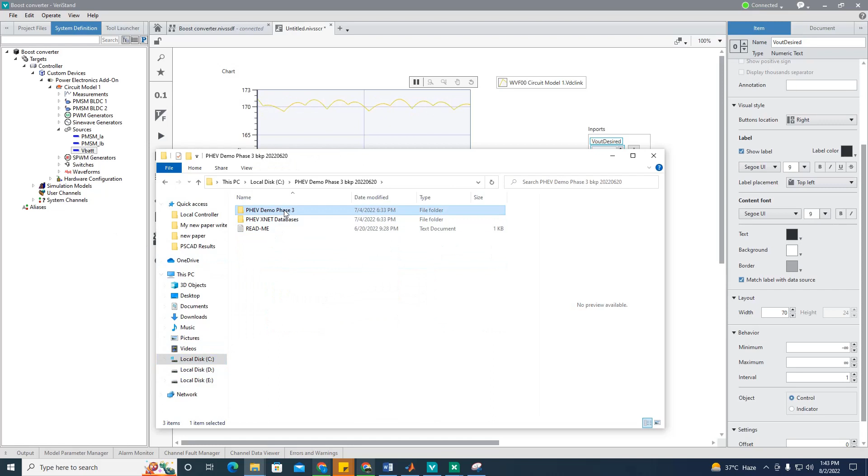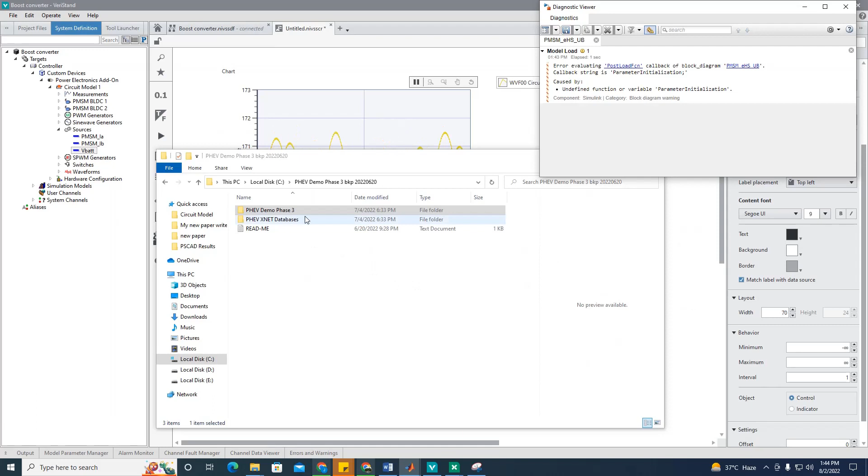So this is a circuit model, and this is the circuit model that is running right now. I am only interested to see for now VDC link, which I am showing over here at the output, and let me show you the controller over here. The controller is shared project, local controller. You can see that this is the controller.

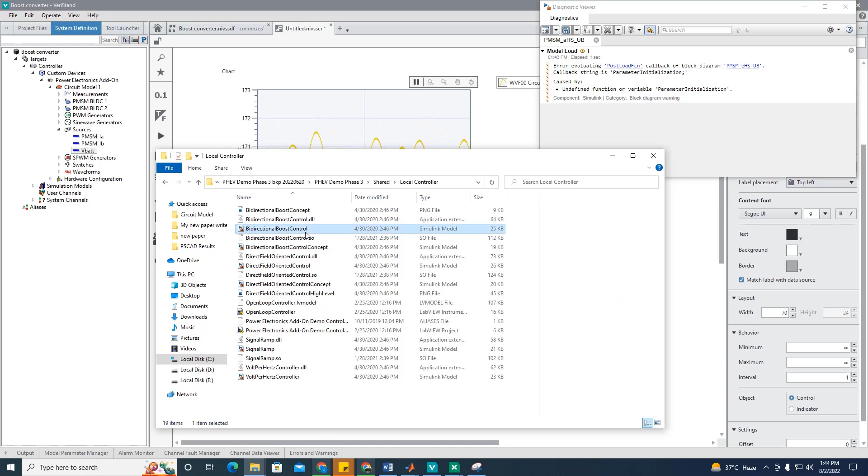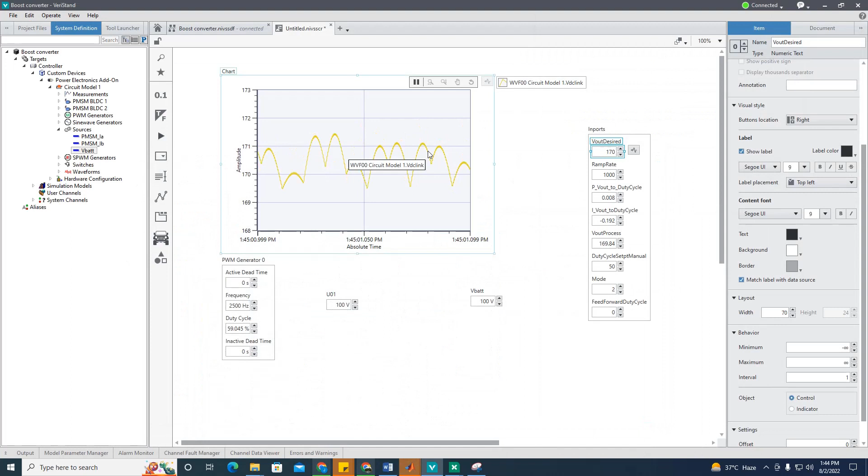All right. So right now this controller is working in Phar Lap, and this is giving satisfactory behavior. Okay. Same controller, now I am going to test it. If I check it in manual mode, in manual mode it's also working fine, 50%. If I make duty cycle 60%, it will move to 250, working fine. 50% will move to 200, it's working fine.

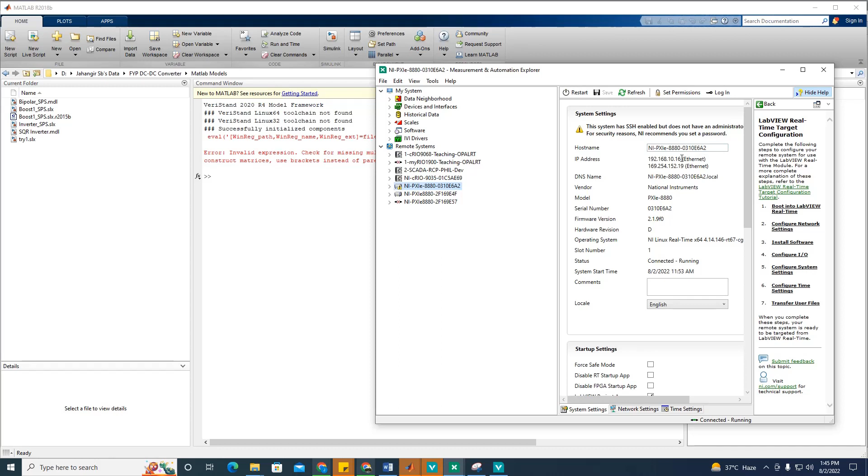Now after that I disconnect it, I go to configure, and I am now trying to run the same example in this PXI which has NI Linux RT with IP address ending in 16. I go here in controller, I select here NI Linux RT. Let's give it IP address of 16, save it,

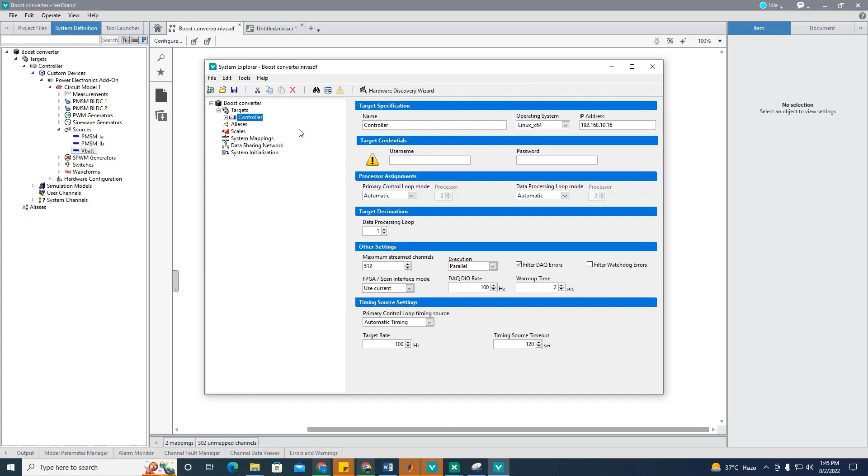and then let's deploy it. At this stage, it should give us an error. I understand it will give an error because the controller file that was operating in Phar Lap was .dll, but now it is operating in Linux RT. It requires a .so file, so it shows that the specific model is not compatible. I understand. Okay, then I go back here to configure.

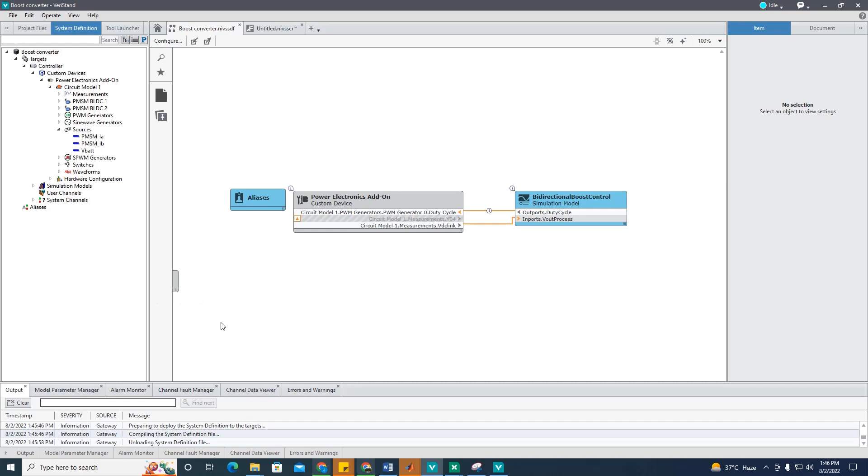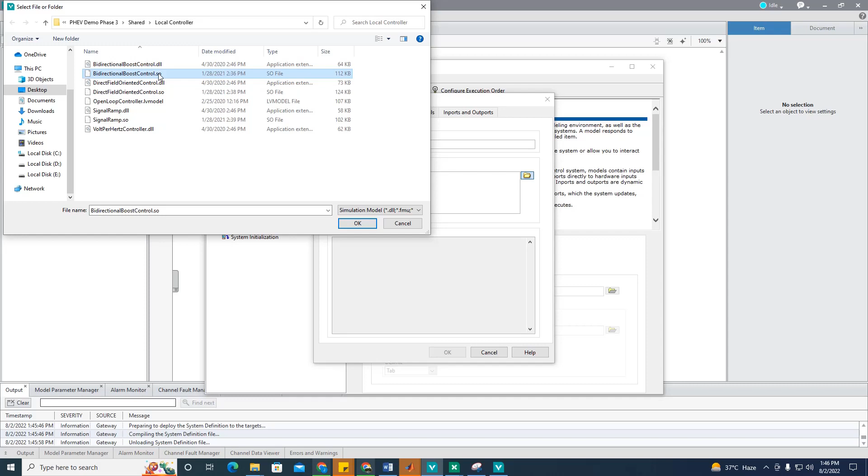I go here to the simulation model. What I do is I remove this model, delete, okay. Then I add simulation model, I search over here and I give it the .so model, bidirectional boost control. Instead of .dll, now we need to give .so because it's Linux RT. Okay, clicking OK. These are the inputs, these are the outputs. Mapping will be the same.

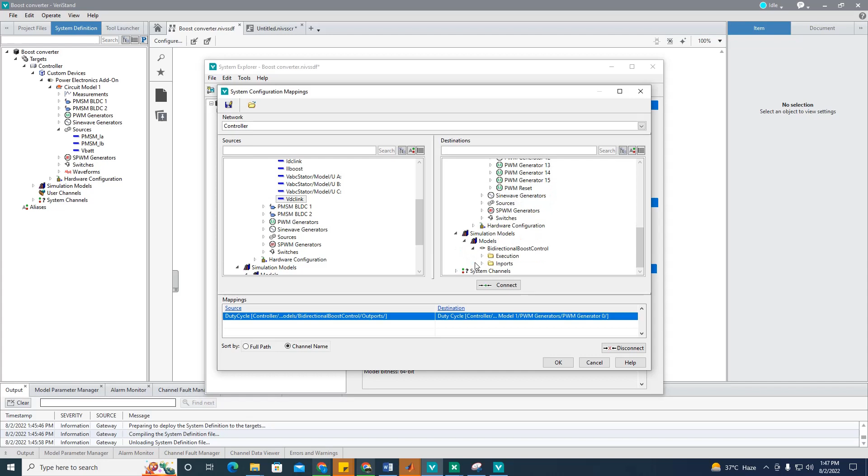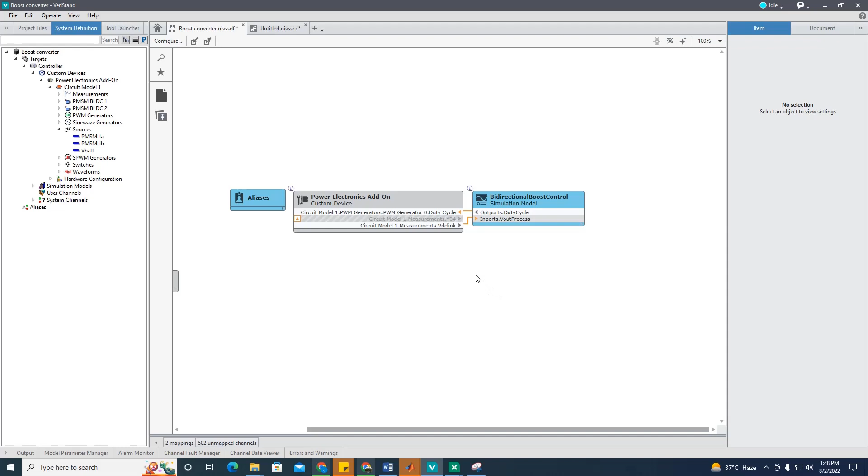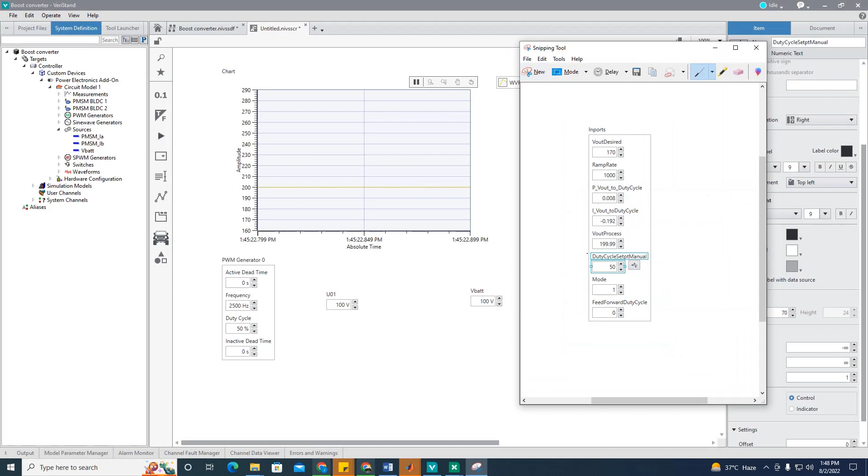Okay. Alright. Now we run it. Deploy. Now before running it, cancel, let me take a screenshot of these parameters. I will keep it the same, though I remember these values. Okay, deploy, save. It will be ready in a few seconds. Yes, target synchronization is complete.

Let's give V battery 100 volt. Let's give V out desired 150 volt. Ramp rate is the same, 1000, as before. P 0.008. This will be minus 0.192. Let's make duty cycle manual 50% and first mode 1. Yes, it's working in manual mode. It's working fine in manual mode.

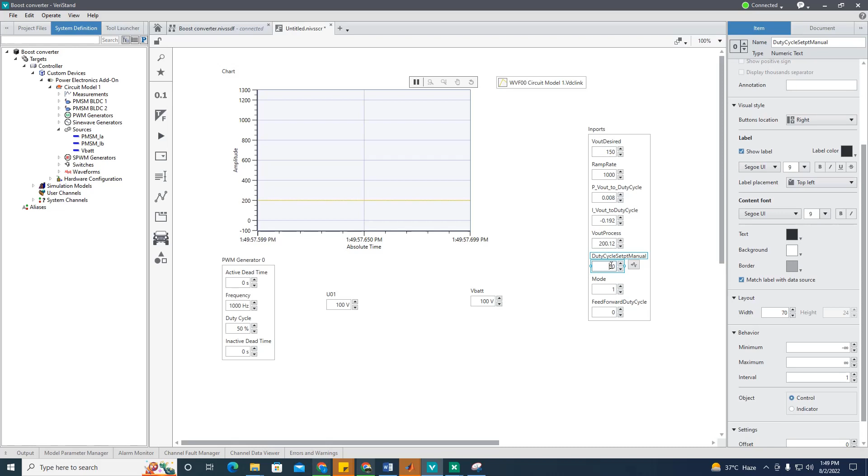If I make it 50%, it will give 200. If I make it 40, 1 minus D 40, then it will give 250 right. It's working fine. Now if I move to mode 2, here is the problem. See? Now basically it should go to 150 volt, but it is showing 203.

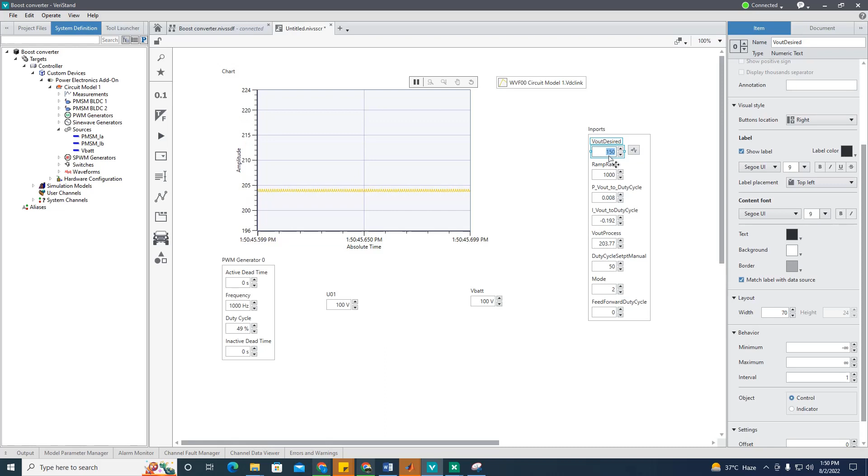So I don't know why, but it's not working in closed loop with the same parameters, without changing any parameter. It should have worked, I think. But here it is not working. Let's change its value. Maybe I make it 170. Even then it's not working.

Can you please guide me what is the problem? You can also remotely access our PC and our hardware. We can have a meeting on this issue, please. Thank you.

Our next step will be to generate DLL files. But before generating the DLL files ourselves for our converter circuits, we want to know why the behavior is different for Phar Lap and for Linux, though it should not happen as far as our understanding is concerned.